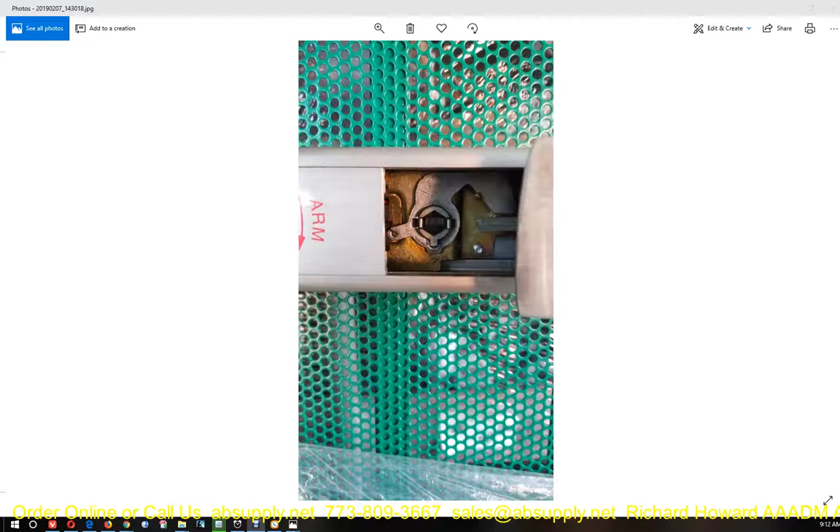A client has purchased a Von Duprin RX AX98NL ALKWH. So this client has a 98 NL series device with an ALK, so that's an alarm kit, so that there's an audible notification if someone exits.

It has an RX switch, and it has WH, which are weep holes, which is not germane to this conversation, and the AX meant that the pounds of force to push the paddle was compatible with California code.

The question the client has, and there were two of them on the job, is that the client feels that he may have misplaced an item or part for the panic alarm inner workings, and there are two photos attached. One is complete, and the second is missing a lever type arm, and wondering if I'm familiar with this. So this is the one that the client is stating is complete.

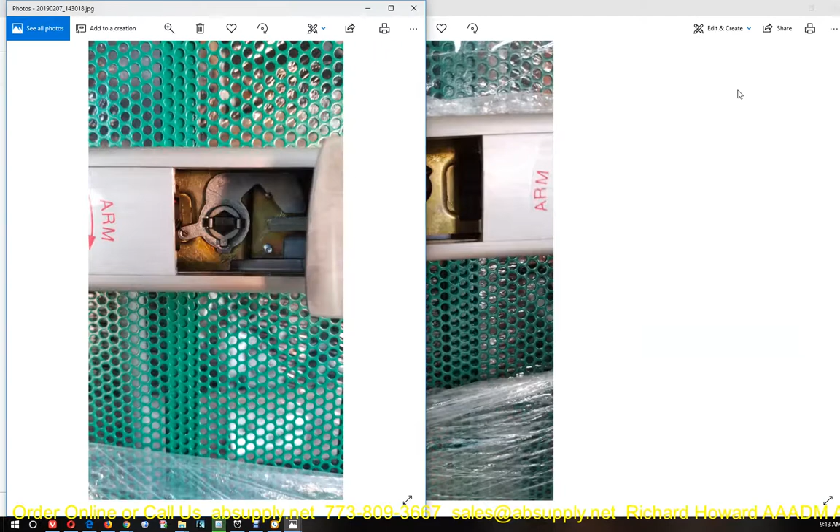What this image is missing, and be mindful that this is an ALK device, and an ALK specifically requires that we remove the dogging assembly on the device. And what happened apparently is the manufacturer, when shipping, went a little too far in removing parts.

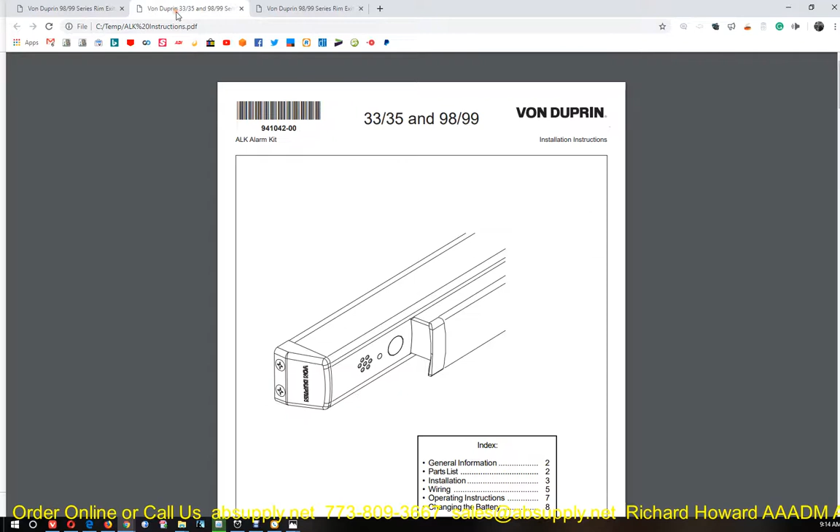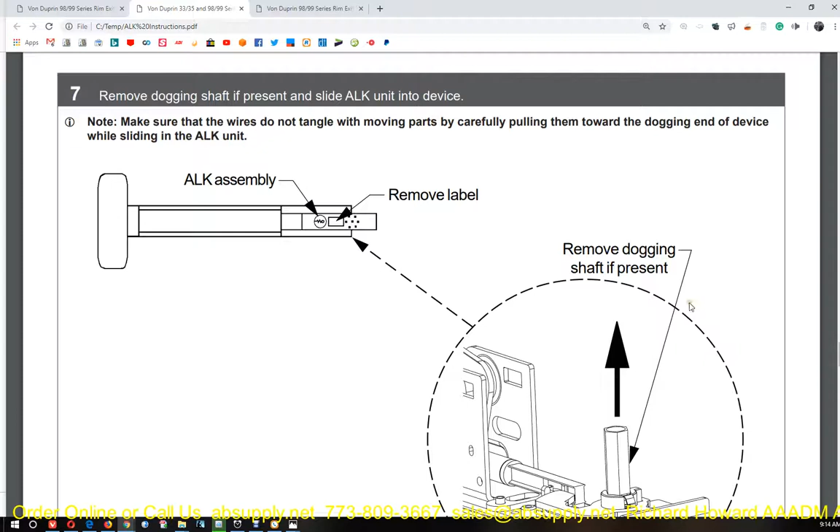So the installation instructions absolutely tell us for an ALK what we need to do. Here's your 99 ALK installation instructions that are linked below this video. They specifically tell us to remove the dogging shaft if present. They tell us to remove this.

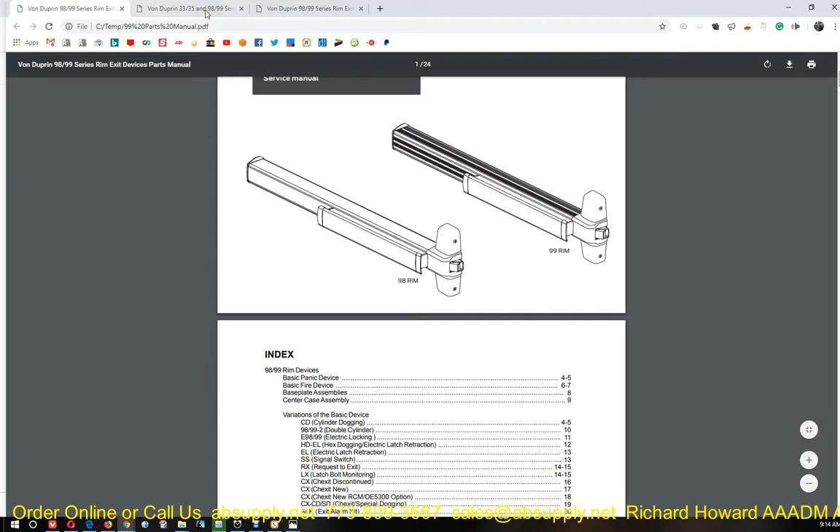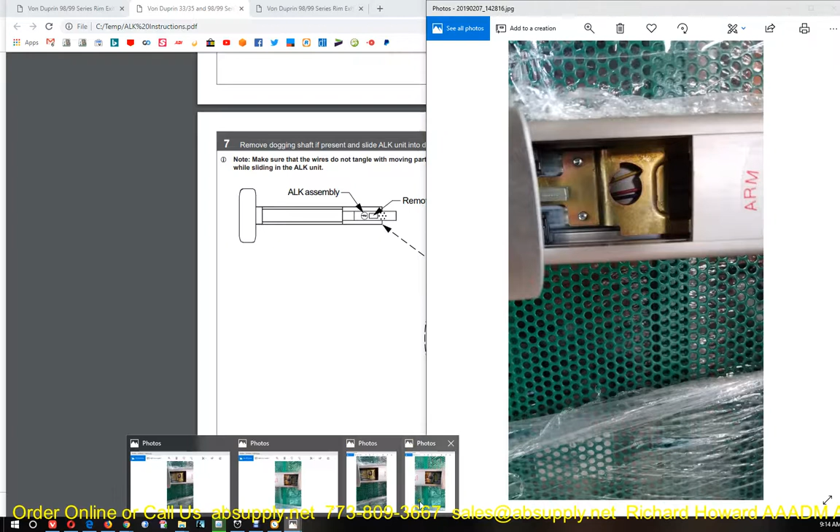Now, what is not clear in the 99 ALK installation instructions is what is activating the alarm kit. So the question is, well, we know we have to remove the shaft, but what about this piece here that is indeed missing in this client's photo over here?

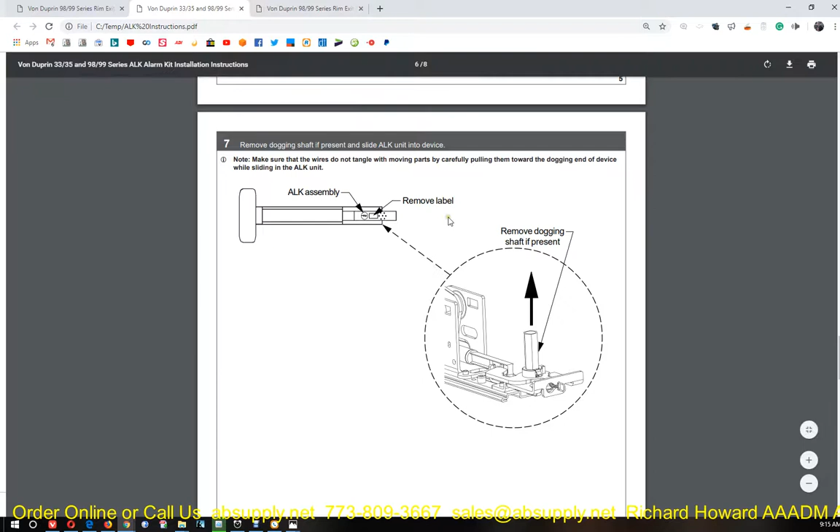So this is the one where the client feels that it's intact, and it is. The dogging shaft has been removed per the installation instructions, but over here, much more has been removed on the second device, is the point of that. Now, that material is called the dogging adapter.

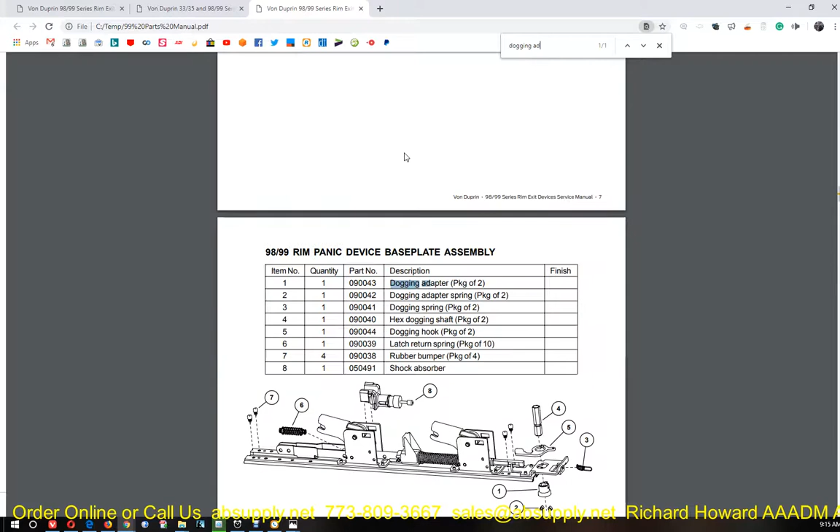This is an exploded drawing. So this is the portion that you remove. This is the dogging adapter. 1 and 2 are the dogging adapter spring. Part 5 is the dogging hook. I should have been calling this the dogging hook. So the manufacturer in the second device removed not only part 4, which is specifically called out to be removed, but also removed the dogging hook, the dogging adapter, and the dogging spring.

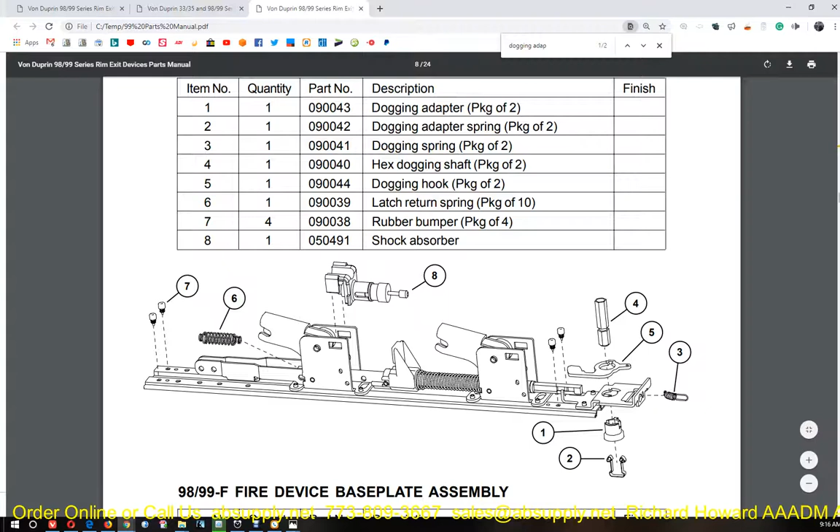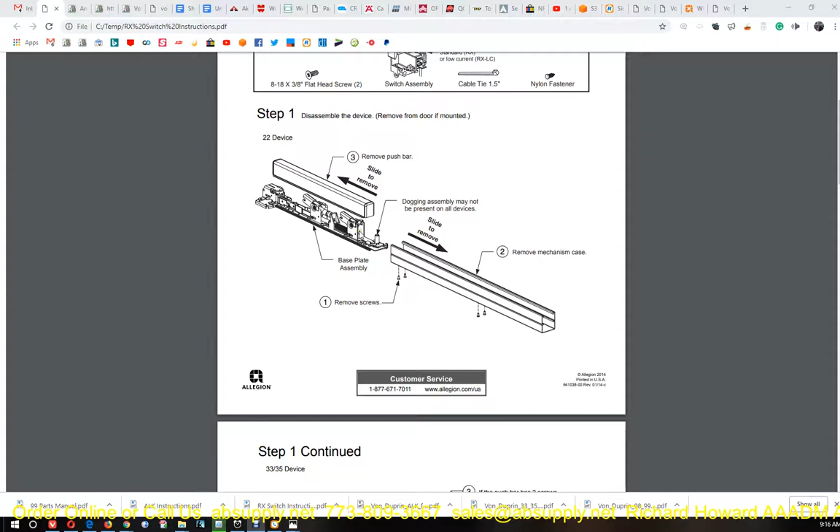Now, because it's unclear to me exactly how the ALK is being actuated, I contacted the manufacturer. And contacting the manufacturer just simply permitted me to confirm what I had already known. The dogging assembly is thoroughly not present when you have an ALK.

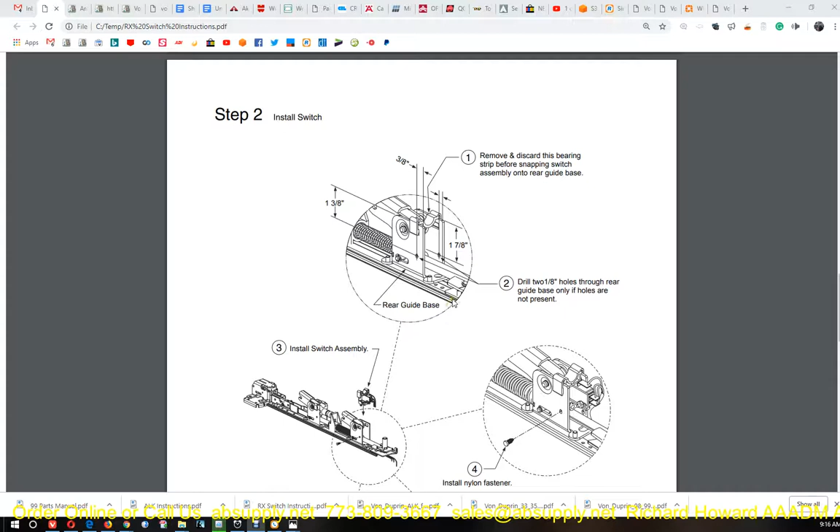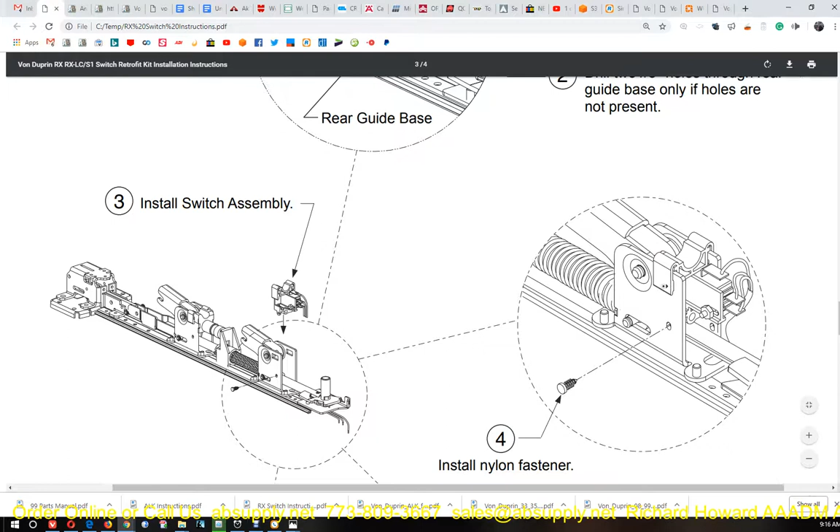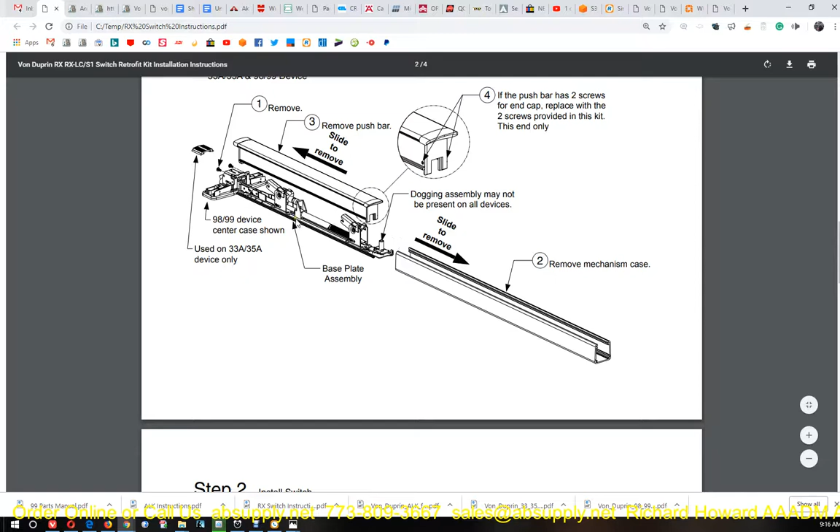The ALK, the alarm kit, is actuated by an RX switch, and that RX switch is shown in the RX installation instructions very elegantly here, where there is a micro switch that is installed here, so that the micro switch is activated when you depress the push bar. So when you push the push bar in, it's going to affect the micro switch that has been installed, as shown here.

That's going to communicate back to the ALK circuitry, allowing it to know whether or not there has been movement on the push bar. There's a micro switch here that is governed by the cam on the key, that will either put this into a normally closed or normally open position, either activating the alarm or bypassing the alarm as shown here. So when the push bar is pushed via the RX switch, which is connected to the ALK itself, depending on the position of this micro switch, it'll either activate or not.

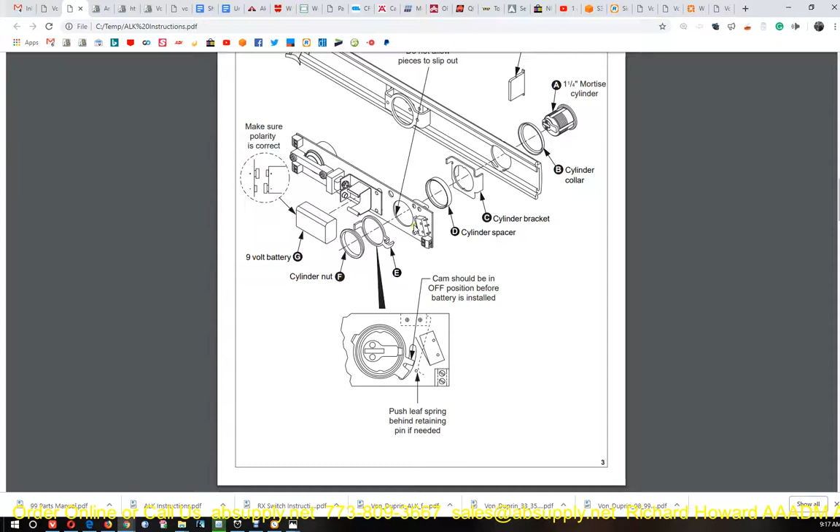The original question is, is it okay for all of these parts to be missing? So dogging hook, dogging adapter, dogging spring, over here it's all gone. There's nothing present here at all. This is thoroughly okay that all three of these parts be gone. They can stay, you can remove them if you want.

The factory ought not to have sent it out two different ways because it does cause an honest question. You can see the wires down below for the RX switch. But there should be uniformity when someone's shipping something out, and they failed to do that, which is why the client questioned it, which is why we investigated it.

If you're doing an ALK, you're going to have an RX switch that's going to govern it, and all of the dogging assembly, at a minimum the dogging shaft, will be removed, and that's okay.